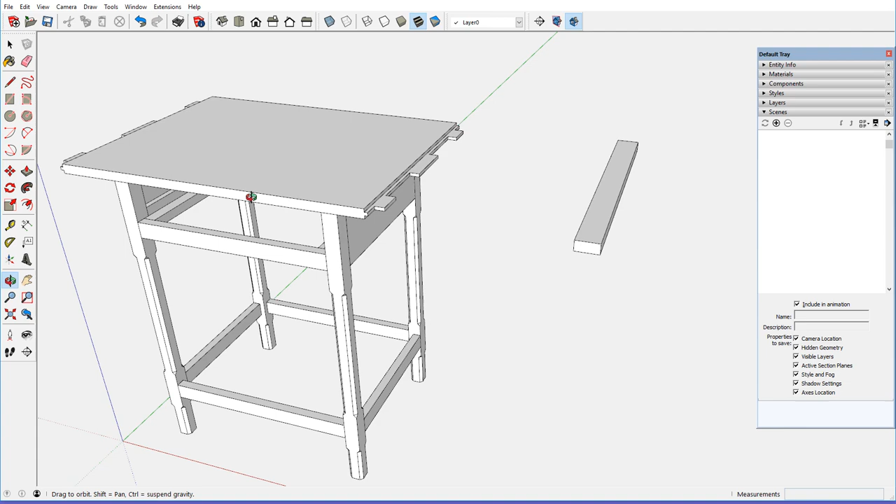This is where we left the chamfered post table after stage 6, adding the top. We detailed the tongue and tenons on the end of the top, but we did not make the matching mortises and so on in the breadboard. In the last session we built the component breadboard here, but there's no joinery. So that's what we'll do in this stage.

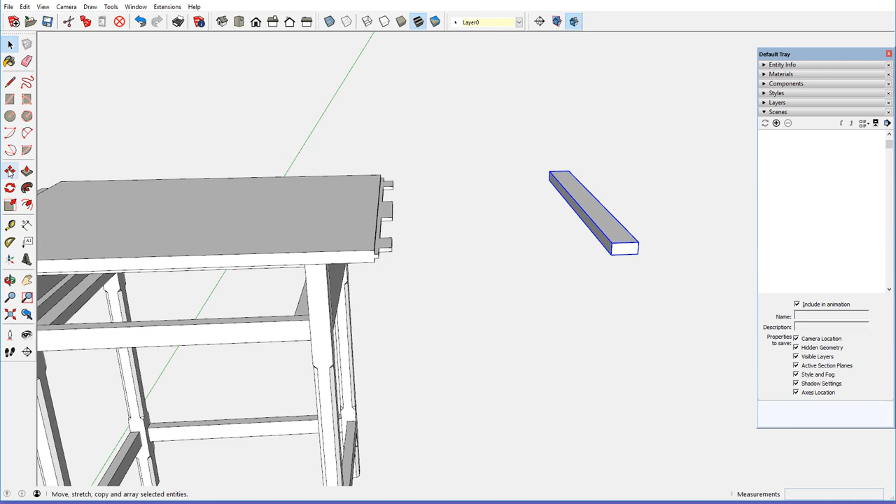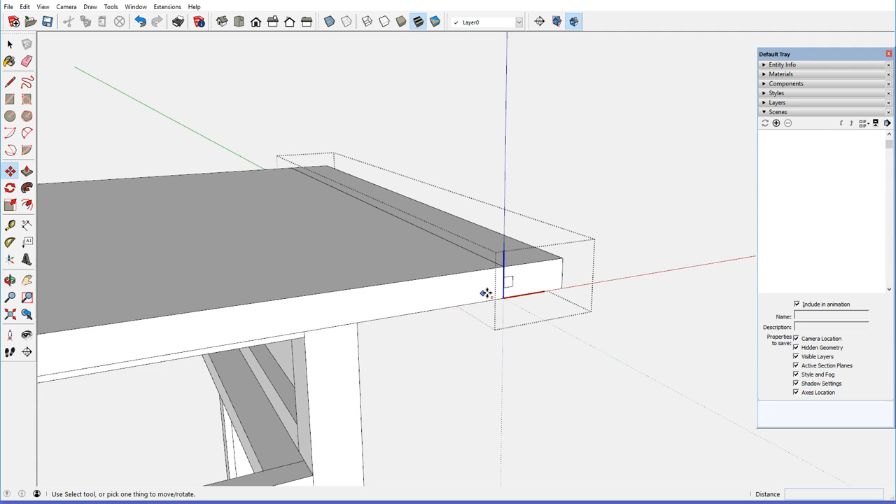The first thing to do is to reconnect the breadboard to the tabletop. So we'll bring that in there. The first thing we need in the breadboard is the socket for the tongue, or the groove for the tongue, which is sticking out here on the face of the top. We can trace over the size of the tongue, and then use the push-pull to create a groove in that breadboard.

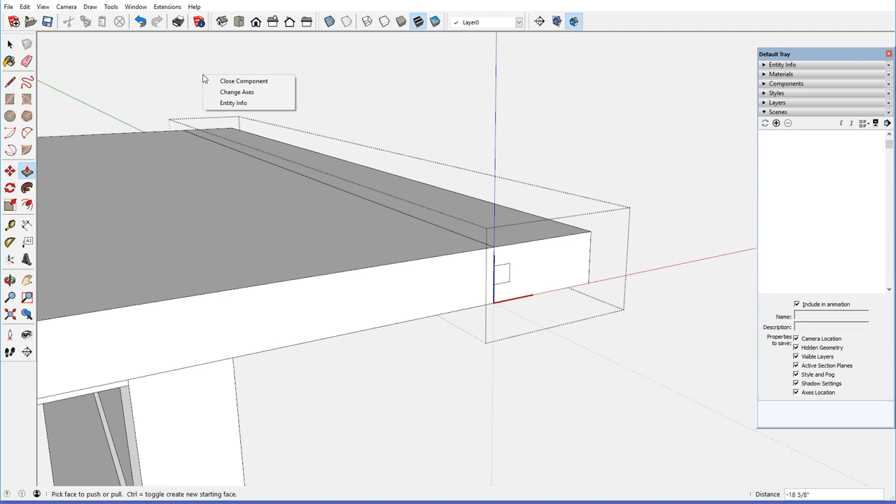Now, just to help see what we're doing, I think it might be helpful to make a copy of the breadboard and put it out here, just so we can see some of the things that are going on. So we've made the groove and that looks right, so that's good.

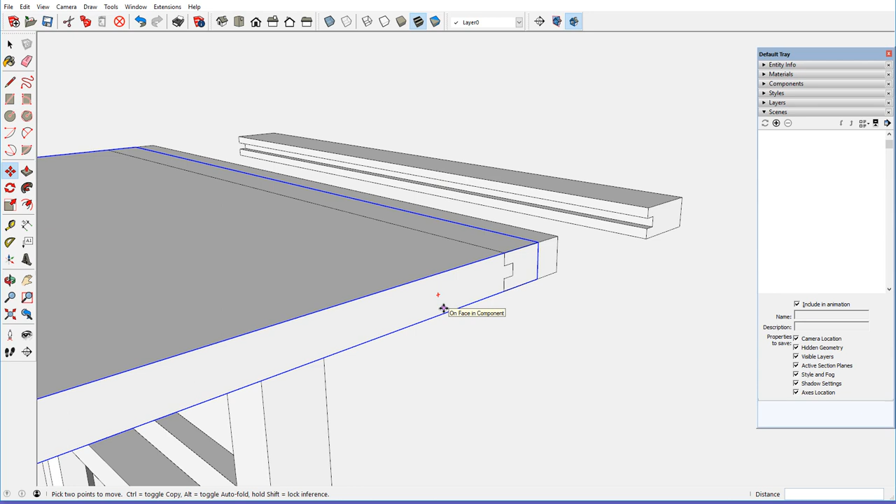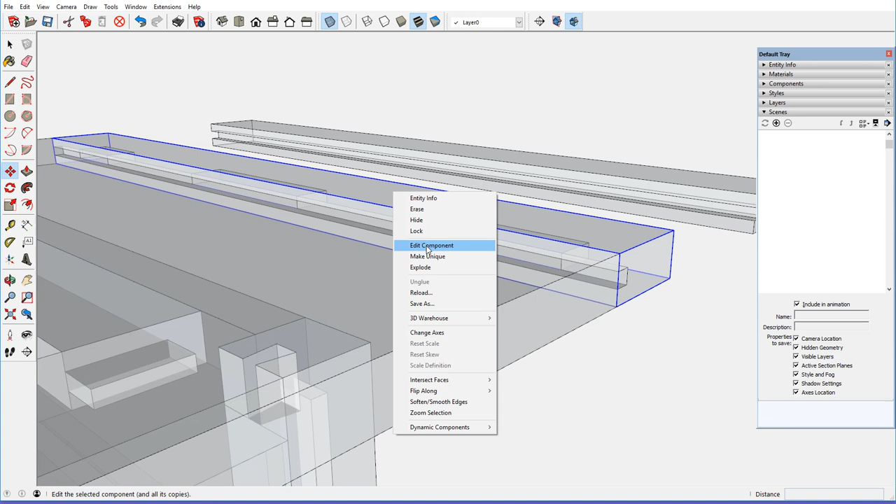Now we've got these longer tenons that protrude into the breadboard, and we need to create those mortises. So I'm going to turn on X-rays to see the tenons coming out, and I can actually edit the breadboard and locate those tenons with some vertical edges, and you can see those pop onto the copy out there. So these edges are defined.

And we can also then push-pull that mortise out to the end of the tenon. And do that for the other two, double click.

Now, since there are some cross grain issues here, where the top can expand cross grain, and of course the breadboard is long grain here, it will restrain the growth and shrinkage of this piece unless we provide some space for that. So I want these mortises to give a little bit of space.

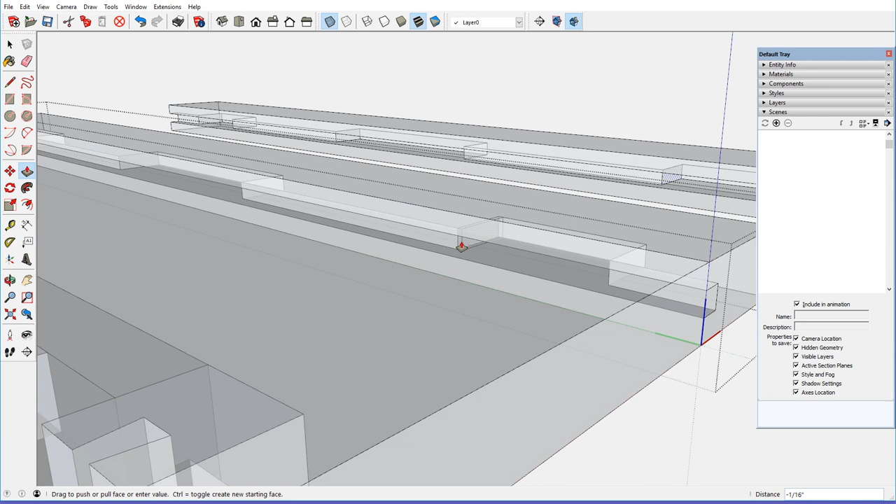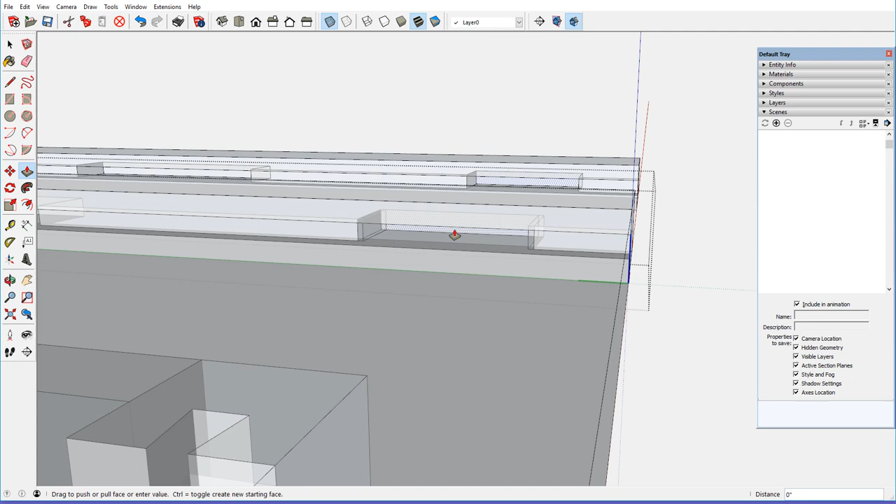I want that mortise in the breadboard to be 1/16 inch bigger. So I'm just bringing that out a 1/16 of an inch, and I'll bring this one out a 1/16 of an inch. Also, we might as well just make the depth also a 1/16 out. So now I've got that spacing.

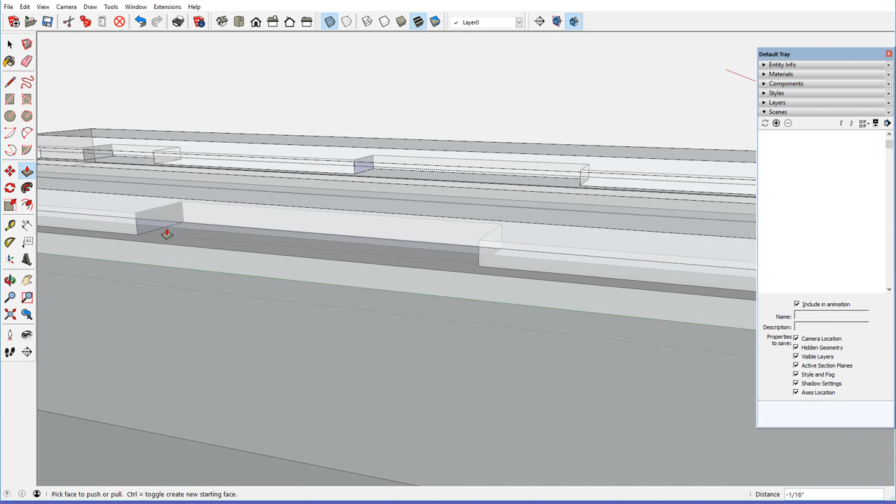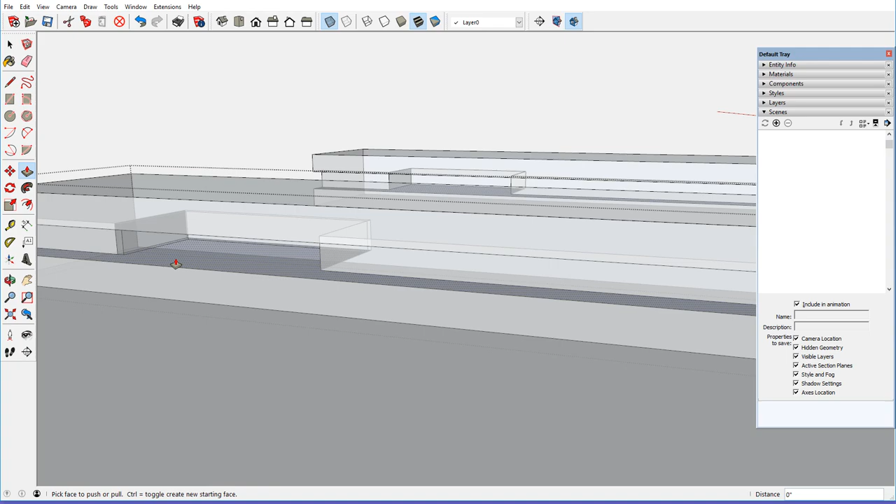This center tenon will be glued, and I don't need the extra flexible space on the edges. That can be a tight fit, but I will go ahead and give that a 1/16 of an inch depth for some space there. And then this tenon again, where it will not be glued, the mortise needs to be expanded out a 1/16 of an inch all the way around. And you can see those changes being made on the copy that we placed out.

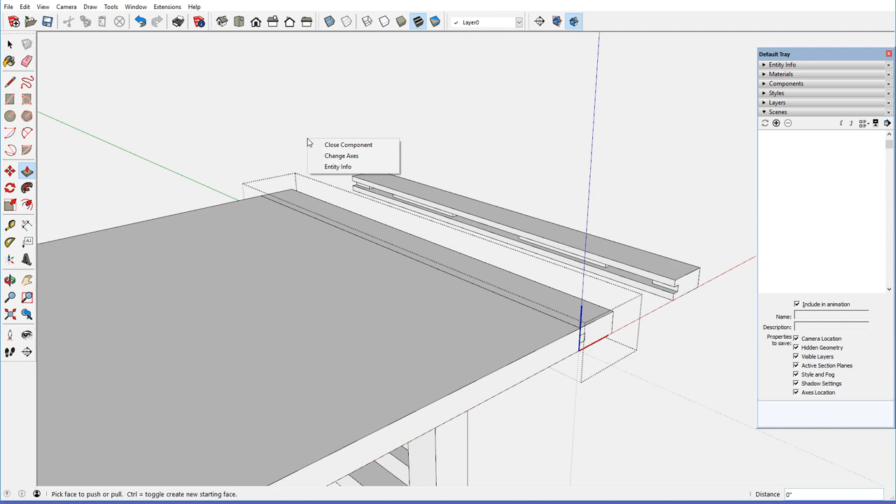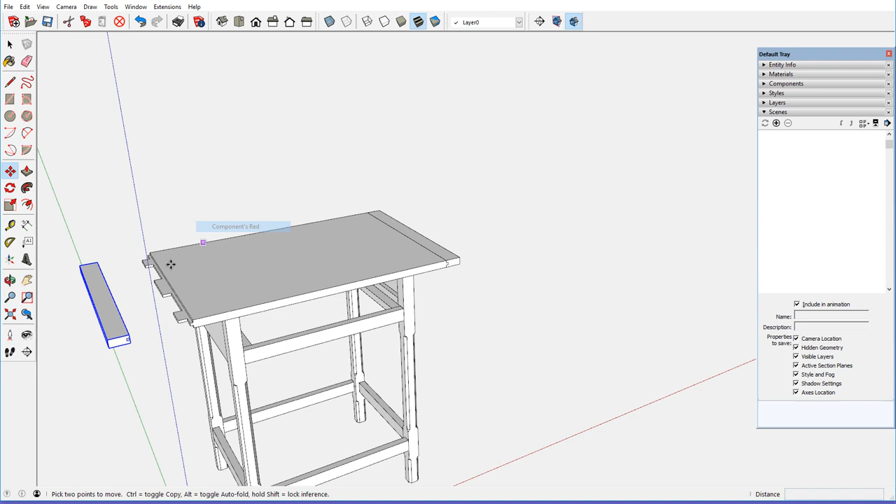So that gives us the proper dimensions on those mortises, and we've got an extra breadboard here to go ahead and put on the other end of the top. Oops, I didn't want to copy that, I just want to move that. So red axis, flip along red, and bring this back in.

Now there are some holes, some peg holes that go in here, but we'll do that later. So this is the end of building the top, and the last thing that needs to be done is a drawer.